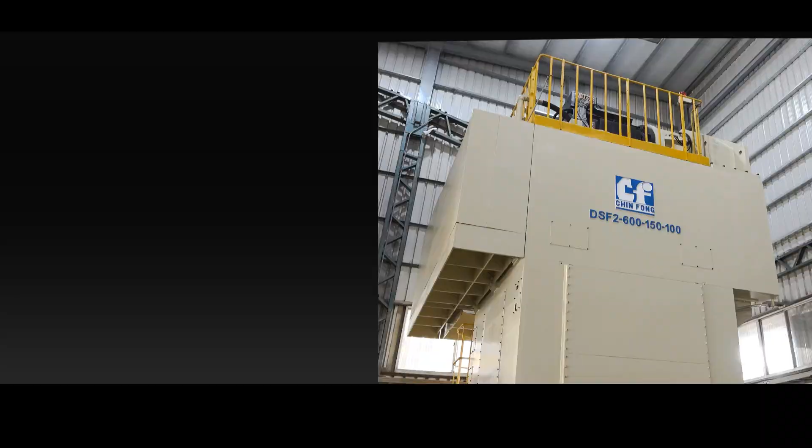Direct drive servo forging press. The frame rigidity is intensified through FEM, and the frame structure reduces redundant materials properly, achieving lightweight design, material saving, and reduced energy consumption.

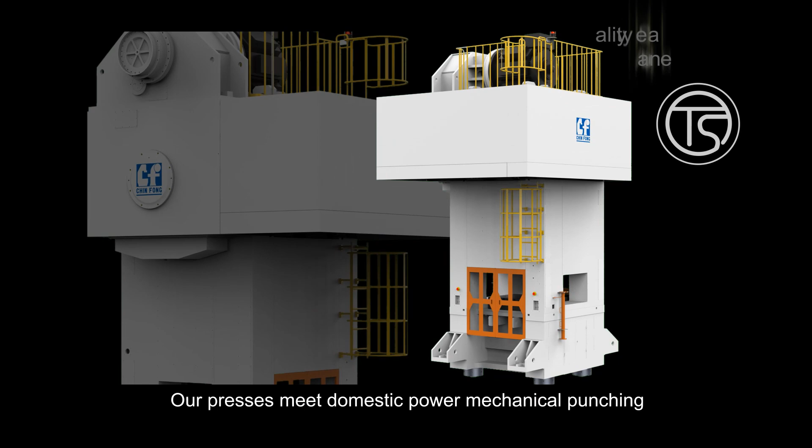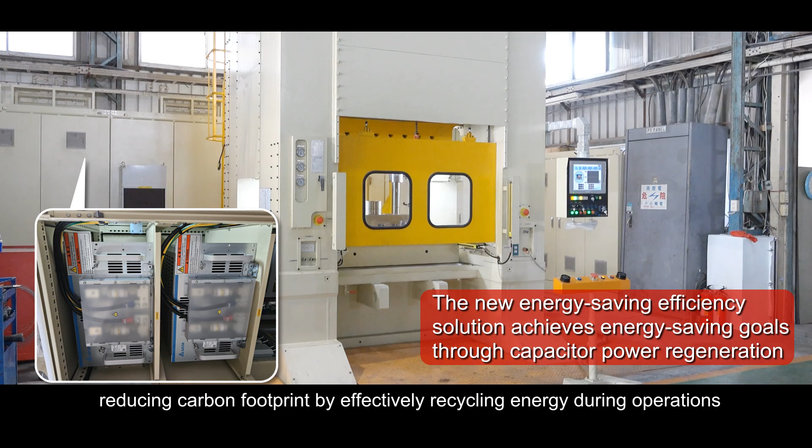Our presses meet domestic power mechanical punching and shearing press machine certification. Equipped with energy-saving devices, the press operational process harnesses regenerated currents, reducing carbon footprint by effectively recycling energy during operations.

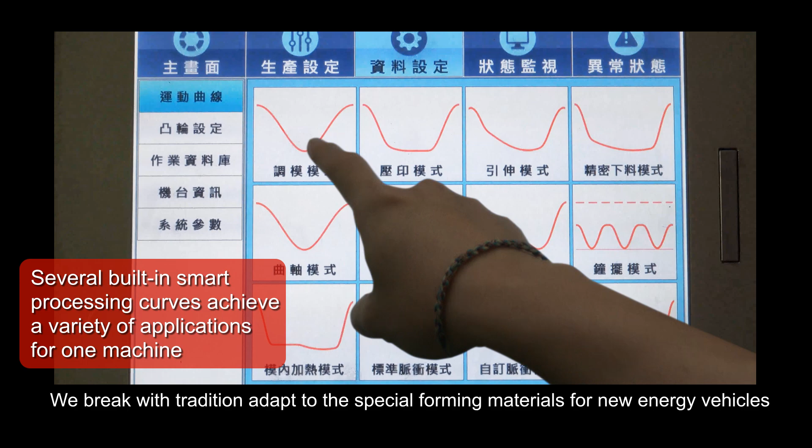The direct drive servo forging press integrates intelligent manufacturing to meet the energy-saving needs, environmental protection, precision, and compound demand. We break with tradition, adapt to the special forming materials for new energy vehicles, and meet the needs of various industries. A variety of intelligent processing curves are built in, which can automatically adjust parameters to meet the needs of different materials and improve material utilization and production efficiency.

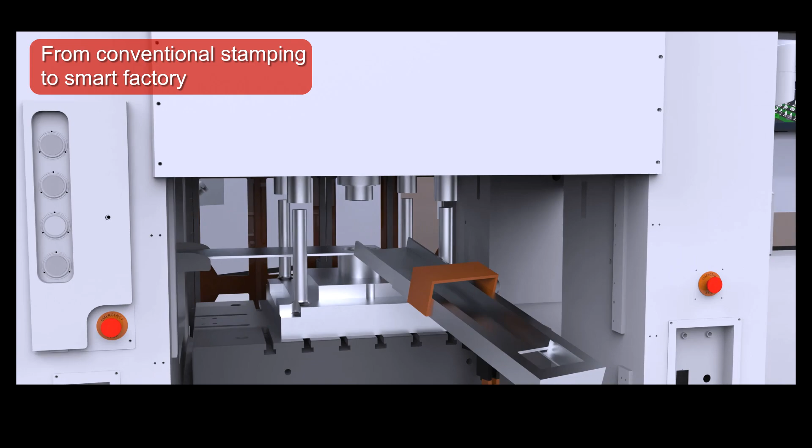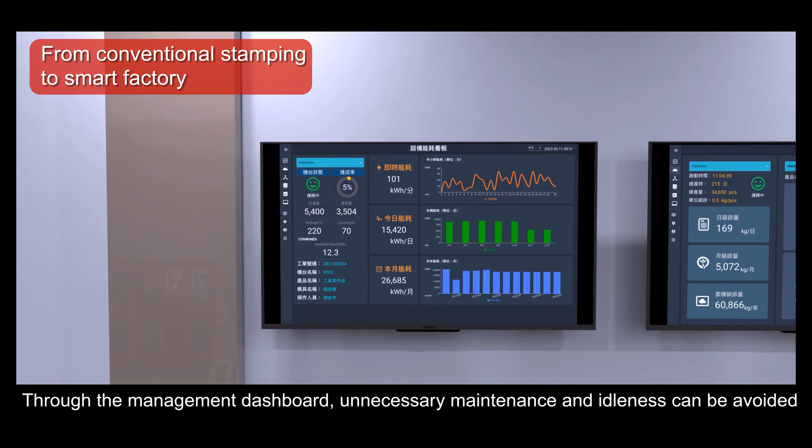Equipped with the iForming Intelligent Productivity Management System developed by Chin Fong, it realizes real-time delivery of equipment information and production data on the cloud. Through the management dashboard, unnecessary maintenance and idleness can be avoided. Efficient process management can be achieved, and environmental protection production with high quality and low energy consumption can be ensured.

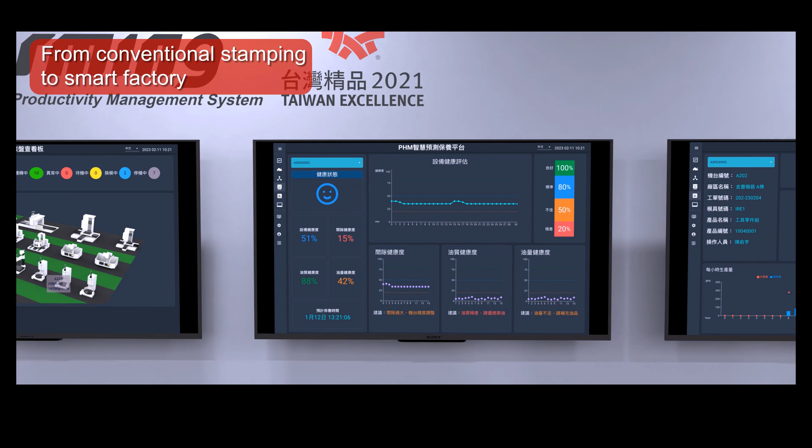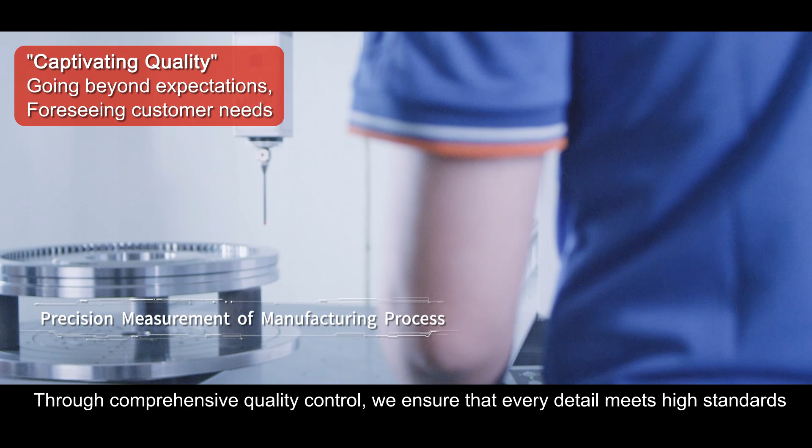Since 1948, Chin Fong has consistently upheld innovation, with 398 employees and 10% of revenue invested in R&D, highlighting our unwavering commitment to technology and industry development. Through comprehensive quality control, we ensure that every detail meets high standards, thus reflecting our precise understanding of customer needs and our commitment to quality in our products.

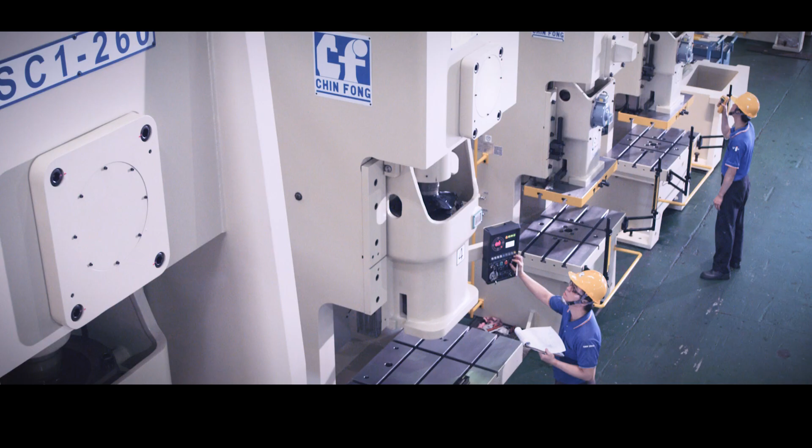With a global network of facilities and over 20 marketing agents, Chin Fong has established a comprehensive service network to ensure that customers receive the most extensive support.